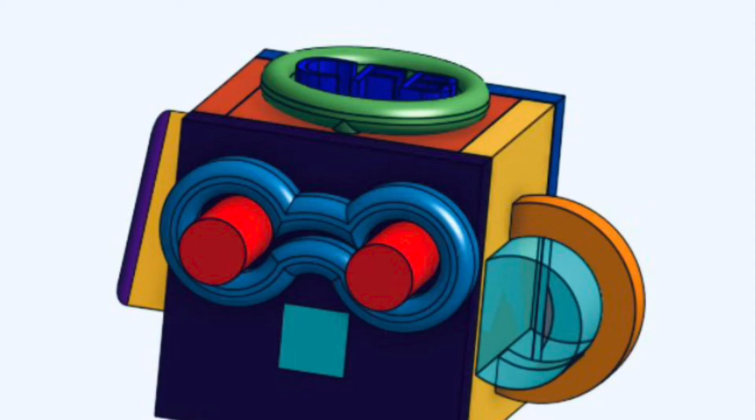Morning. Okay, so now we are going to insert the swivel peg. So my Onshape fancy cube and swivel peg. Create a new version. Create. Part Studio 1, and doesn't matter where you set it down.

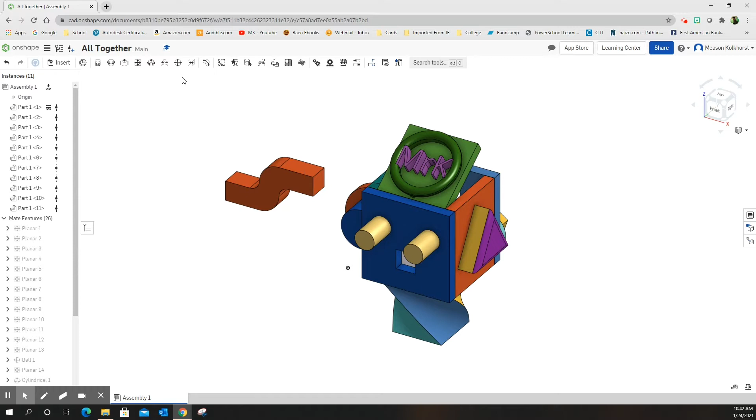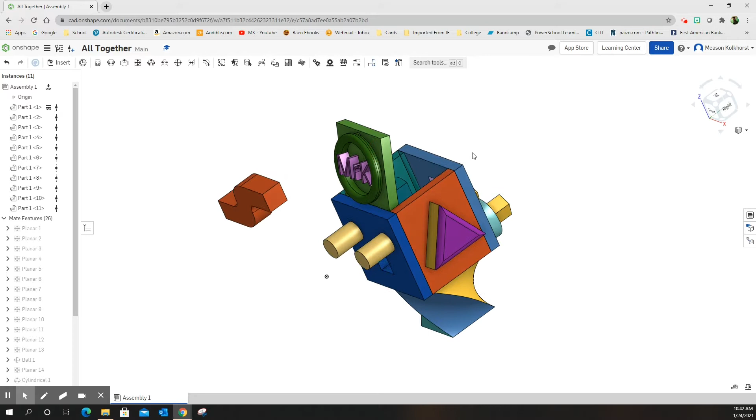Okay, so this swivel peg is going to go inside here, from this hole square to this hole square. So it's going to go inside. So if I take my lid and I tip it up just a little bit so I can see what I'm doing, we're going to put it inside there. So it's going to go from this one to this one. All right, so here we go.

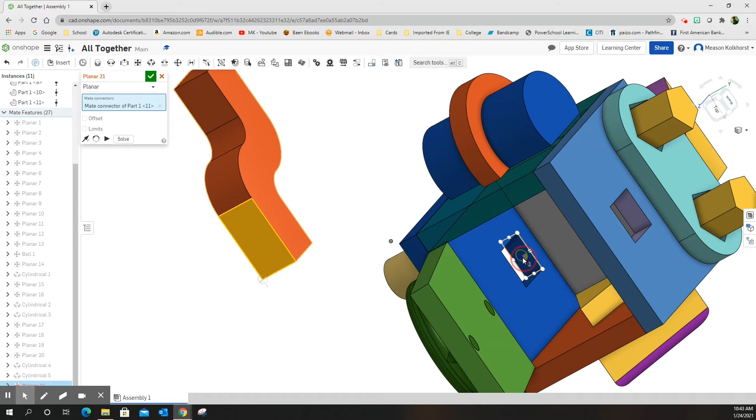Since it's all flat surfaces, we're going to use planar mates. All right, so first one I'm going to do is, let's see, we're going to choose the bottom of this one, and I'm going to put it on the bottom of this one. And if I've chosen it right, now let's see where we are. Let's spin it around so I can see.

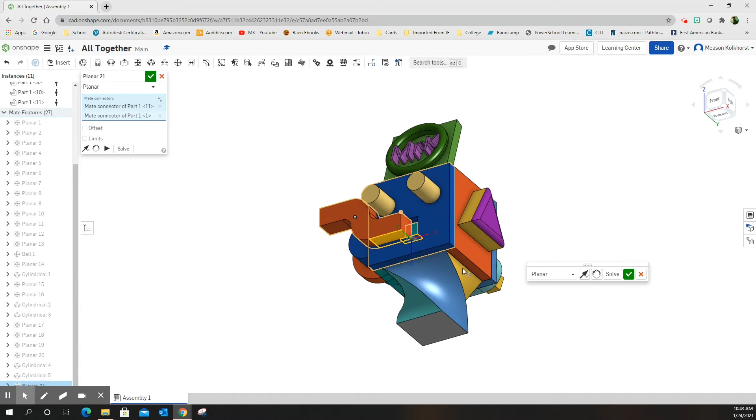Nope, we're upside down, so I need to flip it so that it's right side up. Now when I go here, you can see it's lined up on that surface where we want it. So green check mark. Okay, now I want this surface to line up with the front of the blue surface. So here we go. This surface lines up with the front of the blue surface.

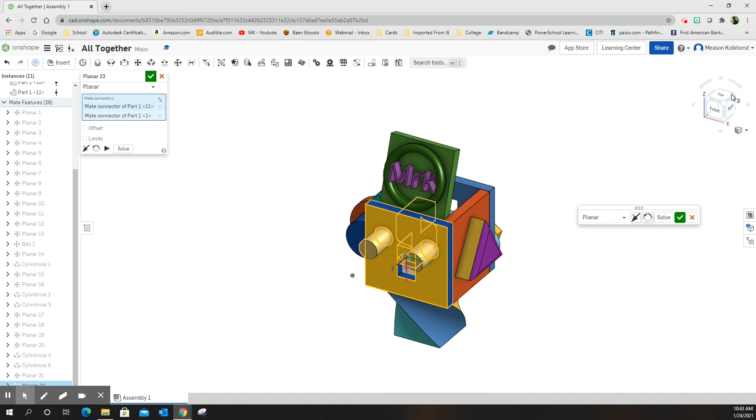Okay, let's make sure we're doing this right. If I spin it to the right, maybe, let's see, green check mark. Worst thing that happens is we have to undo. All right, it's not centered there yet. I'm just moving around trying to figure out where I'm at.

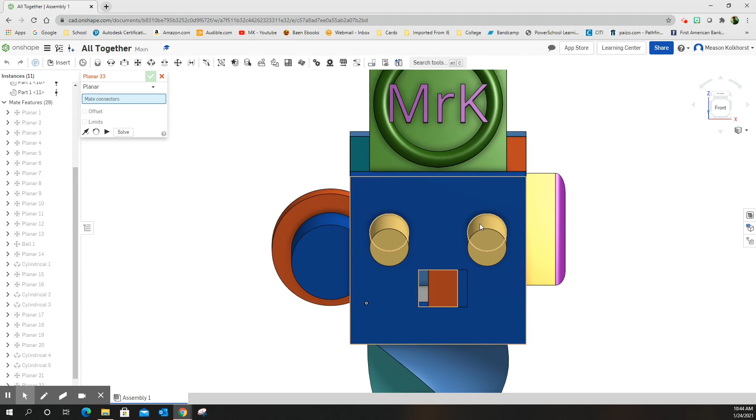Okay, I'm going to exit out here so you can see this guy can now rotate left and right, but it won't, and so we want it in here, but I can't really get it to line up in here, so I'm going to move it out here. Okay, now I need

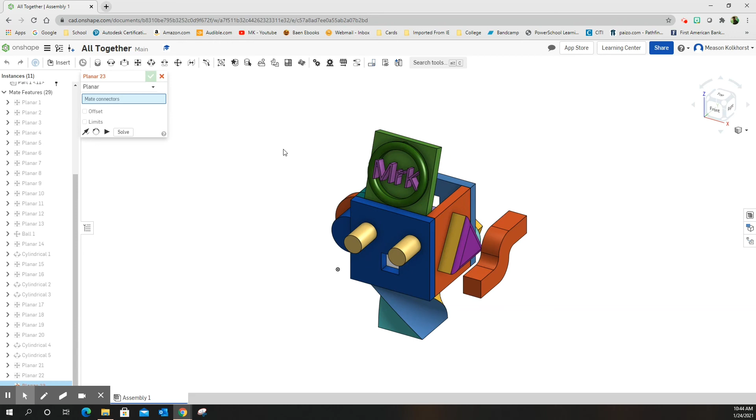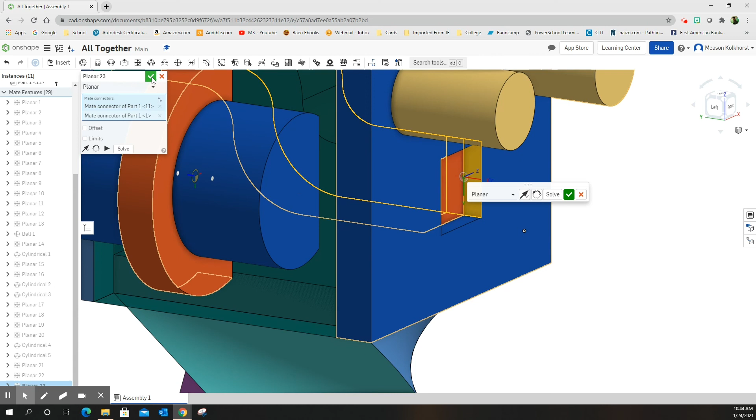this. We're going to choose this big flat surface here, and then I'm going to spin it, and I'm going to choose this. Oh, let me see if I can get it a little bit better. There we go. I'm going to choose this surface. So those two I want flat up against each other. Green check mark, and it pops into place.

So turn it around. We have the square at the top. Turn it around the other way. We have the square at the bottom. Looking pretty good.